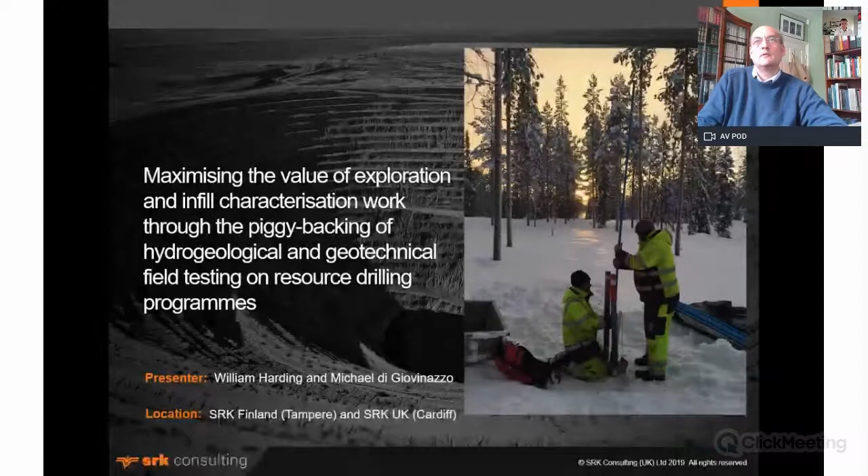Good afternoon, everyone. Today, Michael di Giovinazzo and I will be giving a short presentation on how one can piggyback hydrogeological and geotechnical information on the back of resource and infill drilling programs, effectively to bring project owners more value in terms of early information in the project, and also obviously saving money as well.

The background to this is that we're very conscious that resource and infill drilling programs to support exploration studies entail a lot of drilling over the course of some years. Sometimes on the bigger projects, we're talking about tens of kilometers of drilling. And when you reflect on the fact that those costs are typically 150 to 200 euros per meter, you can accrue a considerable amount of expenditure over several years.

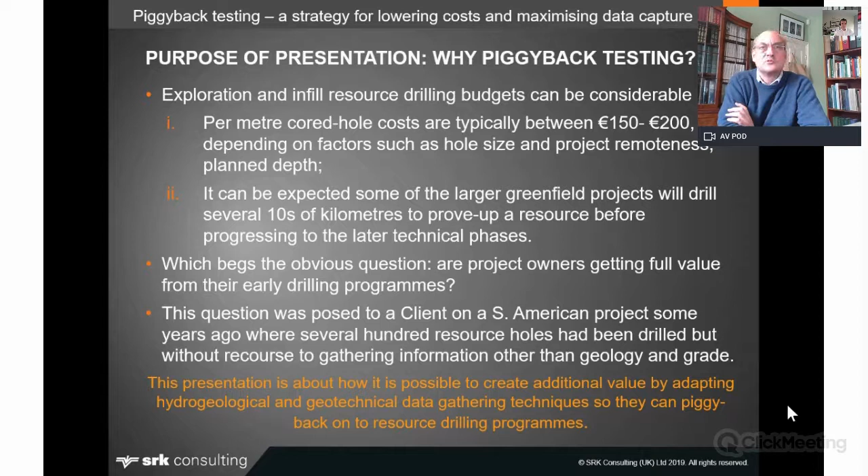So what normally happens with a resource drilling program? You have a series of boreholes, drill hole planning, the rigs attended and the drilling contractors attended for. There's a mobilization, and then holes are drilled, core is photographed, logged, and then cut and sent off for assay. There then follows an economic evaluation of the ore body based on the results of the drilling.

It's really only at that stage that questions start to get asked about, well, if we have a viable project here, we should be thinking about acquiring information to support other disciplines that will go towards producing a project-ready mining study.

But in reality, what we find is that by the time the geotech and hydro and other disciplines come into the picture, questions start to get asked about what's known about the groundwater system, what's known about the rock mechanics, and usually the data is fairly incomplete, not very good quality. So increasingly what we've found is that if one can piggyback onto a resource drilling program, you overcome a lot of the shortcomings of what historically tended to be just focused on a resource evaluation.

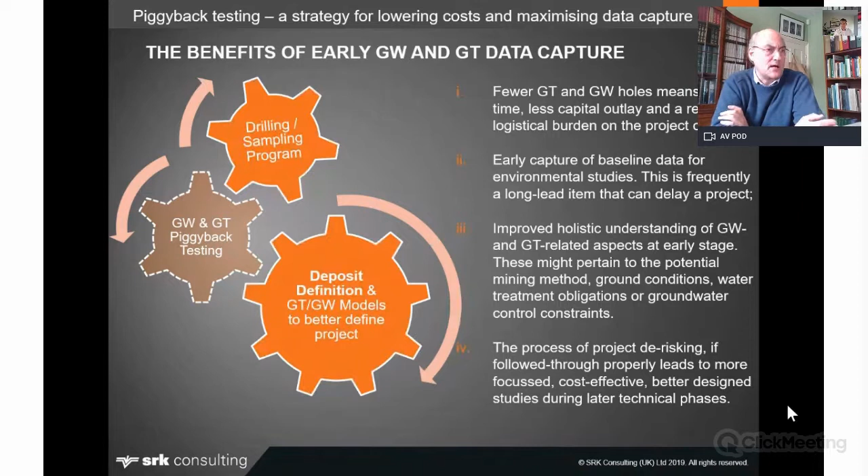I won't go into too much detail about the definition of piggybacking. It's essentially just bolting on extra work to another program. But in order to integrate and adapt hydro and geotech testing work, we need first of all to understand what the challenges are that we need to overcome. Key amongst those is the drilling schedule.

There have been a number of projects that we've been involved with in over recent years where it's very time sensitive, and so it's critical that whatever testing is designed fits into the resource drilling program where the priorities are to support an evaluation of the ore body.

There are other aspects. So from a geotechnical point of view, most resource holes tend to be of limited, in terms of orientation, a limited number of orientations. For a geotech study, you want to vary that orientation to give you some 3D information. And then there are other aspects like adapting to a reduced hole diameter, which impacts particularly on groundwater investigations.

And then, of course, there's also core handling. From a geotechnical point of view, the emphasis is on retaining and capturing as much information from undisturbed core, whereas a typical resource drilling program, there may be a lot of handling, and then there's this core splitting. And of course, if that's done before the geotechnical information is captured, the value of any geotechnical study on the resource drilling is greatly diminished.

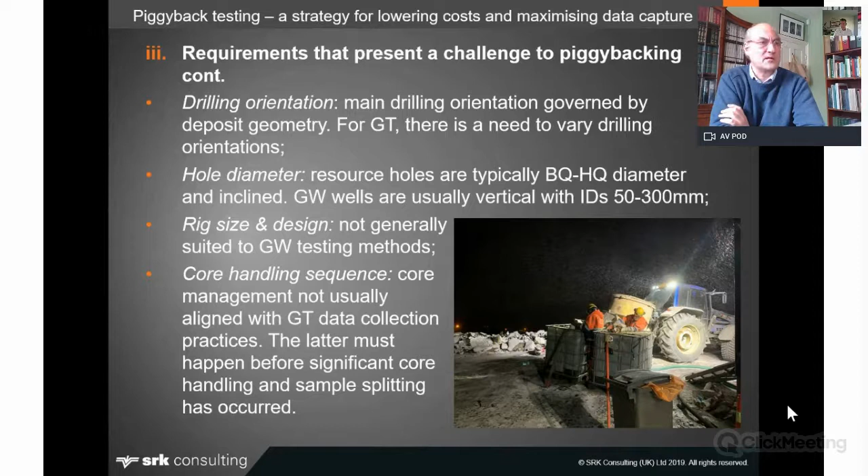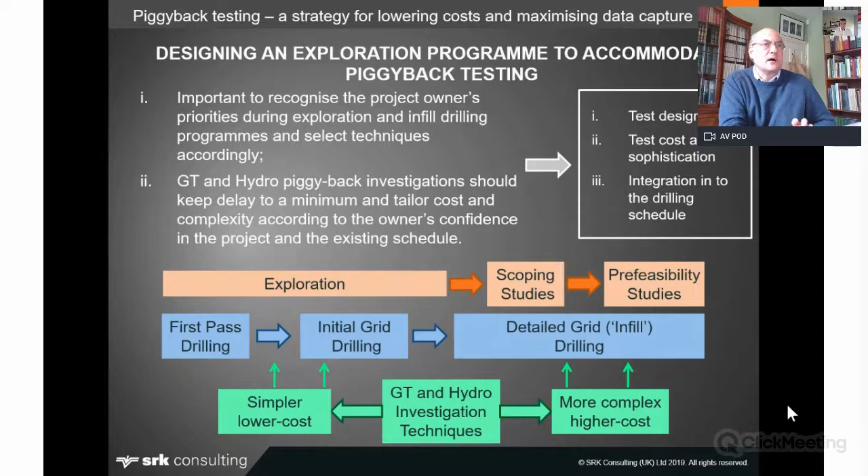There's a box on the right of this screen. This essentially summarizes what I'm going to cover in the next 3 slides. Essentially, I'm going to focus initially on test design. Then we're going to look at how we can adapt the tests to limit cost, and how we can moderate the test design so it's less or more sophisticated. And then I'm going to talk a little bit about integrating testing into a drilling schedule.

So from a hydro point of view, over a number of years, we found that actually you can adapt most hydrogeological techniques to resource and infill drilling programs. It's just a case of the level of sophistication, how you can adapt techniques to fit a much reduced hole size. And the same applies to geotechnical data capture as well. So here I'm just going to talk about testing techniques very briefly. I'm going to pick out a few examples to illustrate, but these are very typically hydrogeological testing and geotechnical testing techniques that we would utilize on the back of a resource drilling program.

So if I touch on packer testing, first thing I can say is that there is packer testing equipment out there that can fit in NQ and HQ holes, which is fairly critical from a resource point of view, because most resource holes really operate within the BQ to HQ size spectrum, which is essentially 60 mil up to 100 mil.

The packer testing is also important to emphasize that the packer testing technique is one that integrates well with the drilling program. You can actually drill an interval, run the clean up, flush the hole, and run the packer in, test 50 meters or whatever that interval that's been drilled, pull the packer out, drill another 50 meters, and repeat the exercise with the packer, and you can run it all the way down the hole that way.

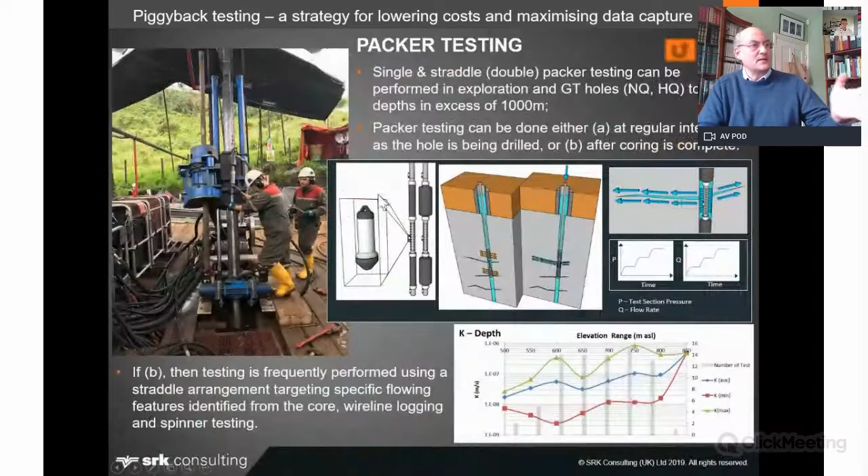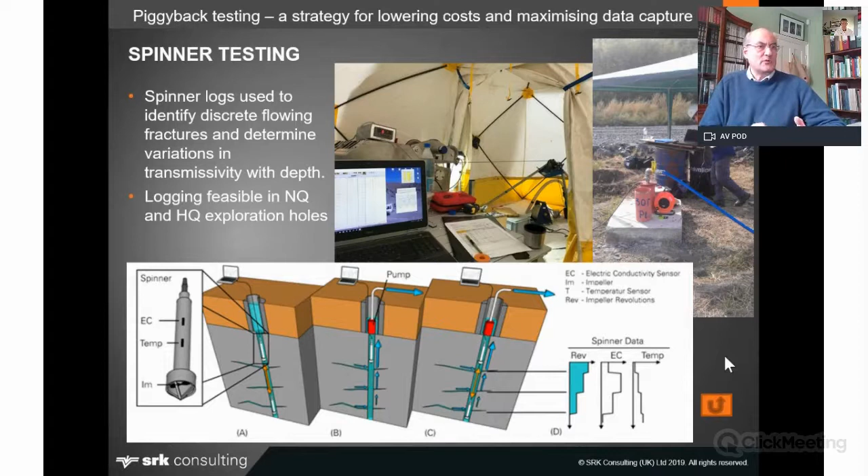So the emphasis there is flexibility and hole size. But what you notice is that we're having to use a rig to operate a packer. At the other end of the spectrum, we can build in monitoring wells that don't require a rig to sit over the hole, using fairly cheap materials, and likewise we can go in and develop and do geophysical and flow logging, again with no rig over the hole. These things are done after the resource drilling rig has moved off the hole.

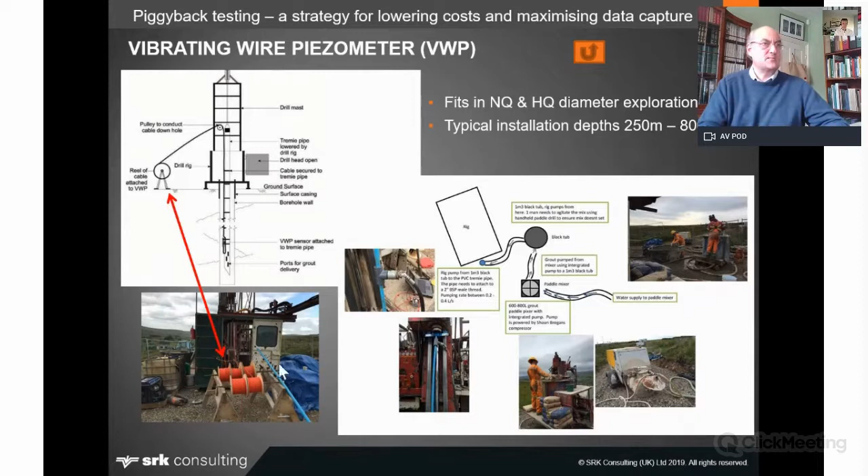Lastly, there's vibrating wire pressure transducers, which are rather more sophisticated than standard standpipe holes. But again, because of the weight of the equipment, we need a rig, and because we need to do grouting and various other things, it's better to have a rig over the hole. So I'm hoping I've demonstrated that there are different levels of sophistication, and some forms of test require rigs and some we can get away without.

The next point I wanted to talk about was how, based on the sophistication of the testing, you can control cost and time. For early stage exploration, you want a fairly unsophisticated, simple form of testing. But as you move into later infill drilling, you can use more sophisticated tests, such as packer testing or vibrating wire piezometers.

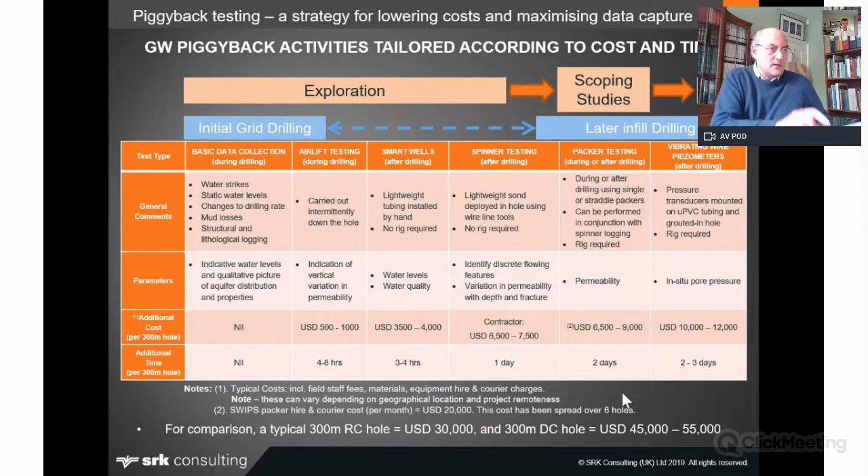The next point, which is really critical from a resource drilling program point of view, and I've touched on it already, is the need to not impinge too much on the resource drilling schedule. The two examples I have here on screen are based on actual time-pressured drilling programs, where we've worked with the project owner and the geologists on the team to develop different techniques to limit the amount of time the resource rig is on the hole.

If we, for example, were to use flow logging and smart well technology on the hole, there would be no delay to the resource rig. Alternatively, if you wanted to do something more sophisticated and use packers or vibrating wire piezometers, the rig would be on the hole for longer. That would obviously delay the program a bit, but the quality of the information you get out of it is better.

Michael, can I pass over to you, and you can perhaps chat very briefly about the geotechnical characterization and how we can adapt that? Thank you, William.

Most of what William has mentioned regarding the hydrogeological testing is related to the drill hole and during the drilling phase. From a geotechnical point of view, a lot of data can be collected in the early stages of the logging program for quite a bit less time than maybe thought a geotechnical logging program may entail. Usually fractures are counted and an RQD, rock quality designation, is determined in most programs, but by collecting another three parameters, you can get close to achieving one of the rock mass classification systems in your very early studies.

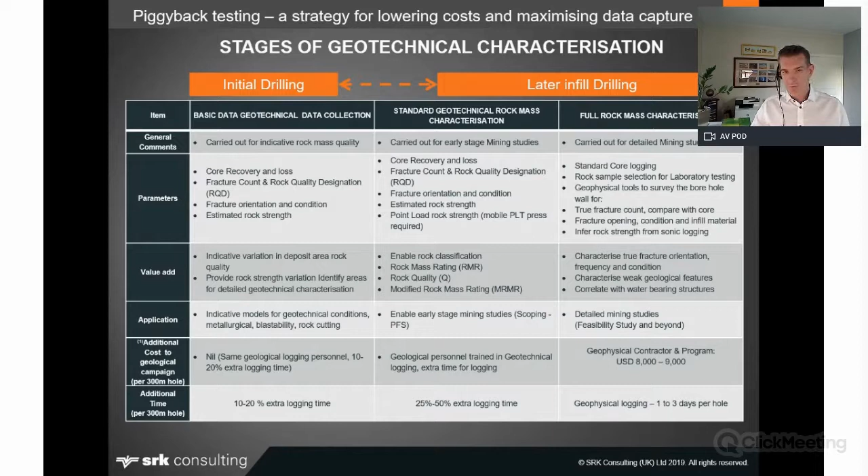So as I've got down the bottom of the table on the bottom row, 10 to 20% extra logging time using the same geological team that is logging the geology and structural geology, you can achieve a geotechnical baseline data set. For interest further into the study, there is extra time required in logging, so another 50% extra time will achieve the full set of rock mass characterization, logging, and therefore analysis.

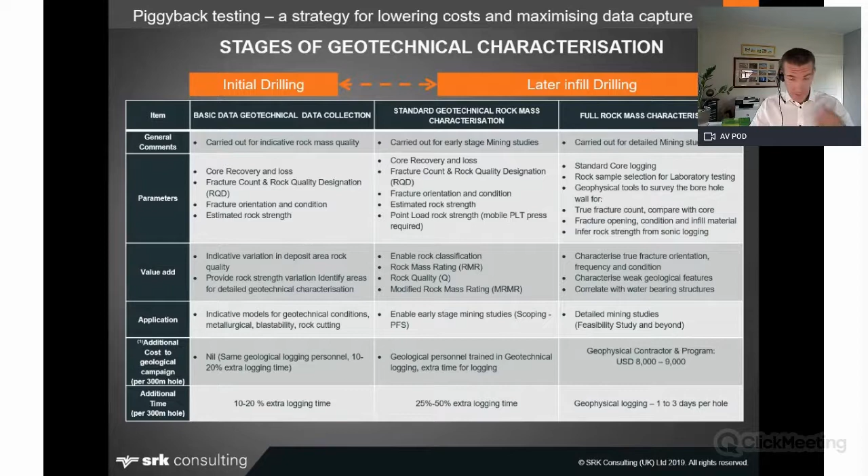And further down the line, you can employ geophysical techniques like what William is talking about, and actually scanning the borehole wall, which further defines what ground conditions you'll interact with. Just the next slide, William.

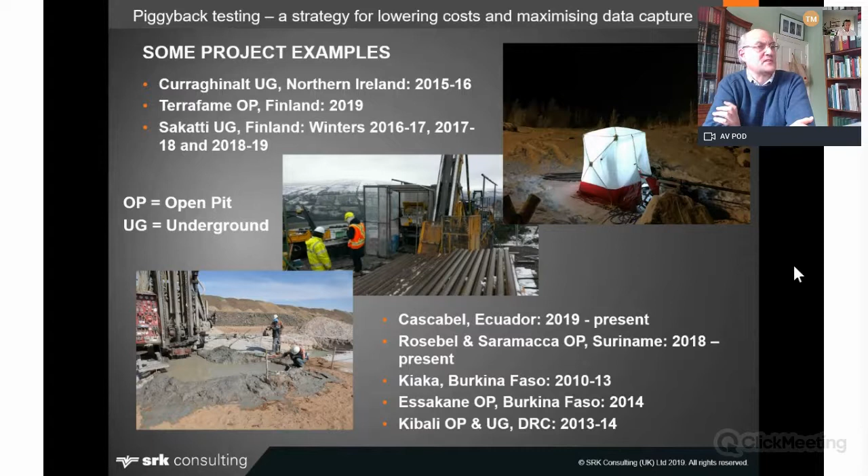So we're going to wrap up now. I just wanted to show a few examples of projects that have been completed in Northern Europe and Western Europe, in Africa and Latin America over recent years, where the project owner has carried out exactly what we've been describing in this presentation.

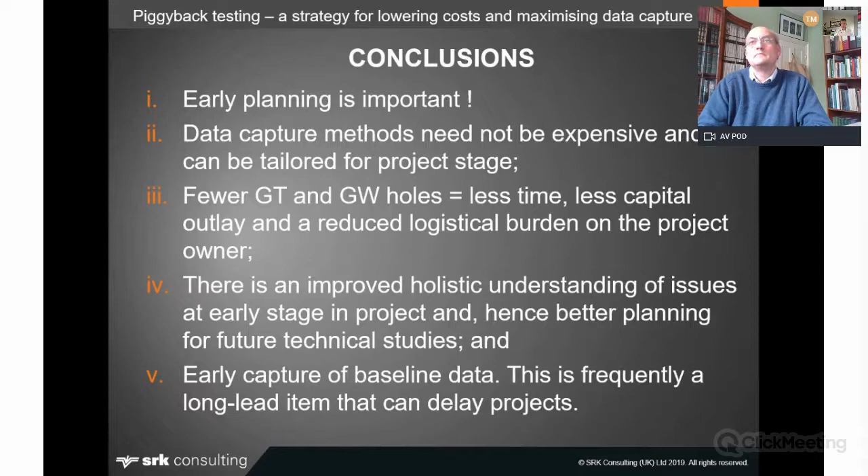Okay, we'll move on to our second presentation. Chris Bray is a principal mining engineer with SRK in the UK, and Chris is going to discuss planning for the use of battery electric equipment in underground operations. Something that we're seeing a lot of interest in, and I think will be of interest to quite a lot of people. So over to you, Chris.

Thanks. Okay, thanks for the introduction there, Tim. Is the slides coming up okay?

I would like to introduce you to some of our team's experience in planning for battery electric equipment in underground mines, where we continue to develop our capabilities with the progressing technologies in order to support mining companies.

Battery electric technology is increasingly being considered by mining companies as an alternative to conventional diesel power for underground mobile mining equipment. The SRK Group continues to develop and support mining companies in assessing the potential for battery electric equipment with mine planning, ventilation, cost estimation, and simulation capabilities.

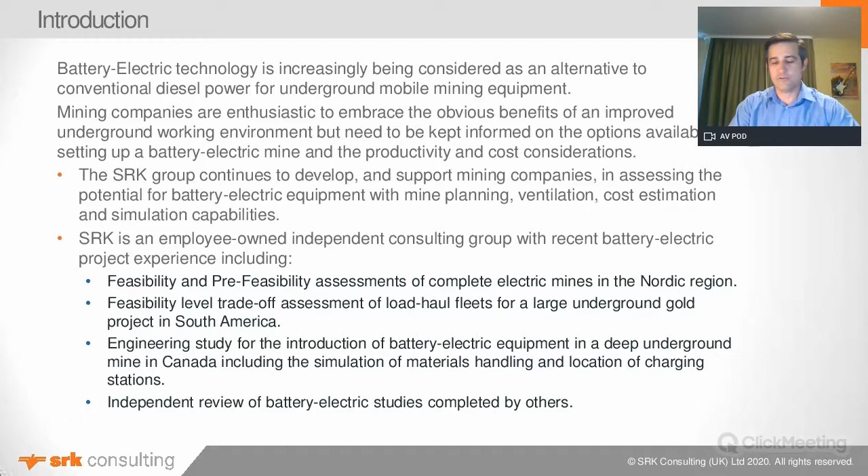SRK is an employee-owned independent consulting group with recent battery electric experience on projects and operating mines, including the Nordic region, up to a feasibility level.

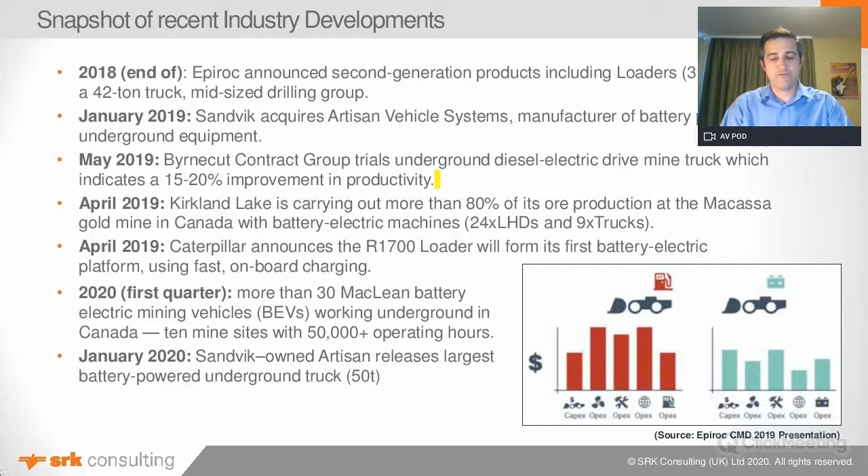This slide provides some examples of battery electric developments with equipment suppliers, mining companies, and contractors over just the last 2 years. It should be noted that the Kirkland Lake Macassa mine started using battery electric equipment back in 2012, and reports now indicate that it is using the technology for more than 80% of its ore production. Battery electric equipment options continue to increase through equipment providers, and factors such as equipment capacity and battery charging time are also improving as the technology continues to develop.

One of the most positive benefits from an electric mine is the improved air quality, which reduces the ventilation infrastructure requirements and includes smaller or fewer ventilation raises and fans. Ventilation requirements for diesel equipment are primarily driven by the combined engine power operating at any period, while electric equipment ventilation is more driven by minimum air velocities to manage heat, dust, and personnel underground.

Emissions are significantly reduced, as indicated by the comparative example table, showing the contribution from equipment and blasting activities to emissions from the mine for both a diesel mine case and an electric mine case.

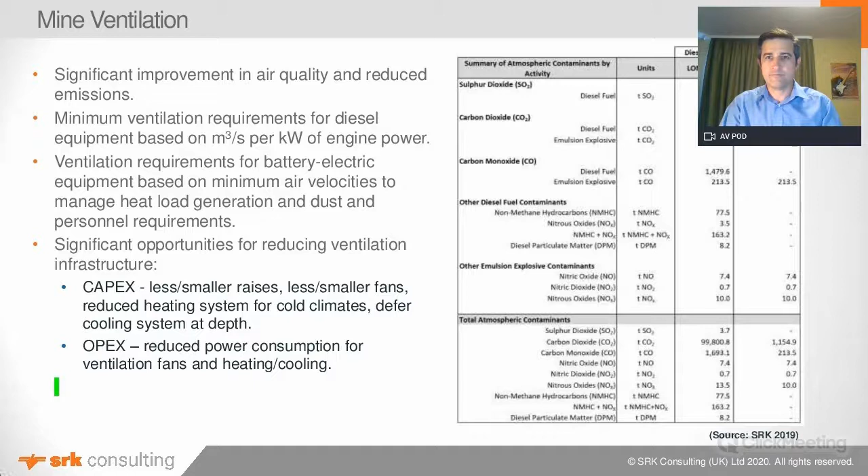The project economics are one of the primary drivers for a mine deciding to go down the path of battery electric technology, and the example shown here is for a battery leasing arrangement. The capital costs for electrical infrastructure can be minor in the big picture for developing a new underground project. Operating costs are heavily dependent on the cost of battery leasing, diesel, and power consumption. Material cost savings can be achieved through reduced maintenance labour and wear parts for battery electric equipment.

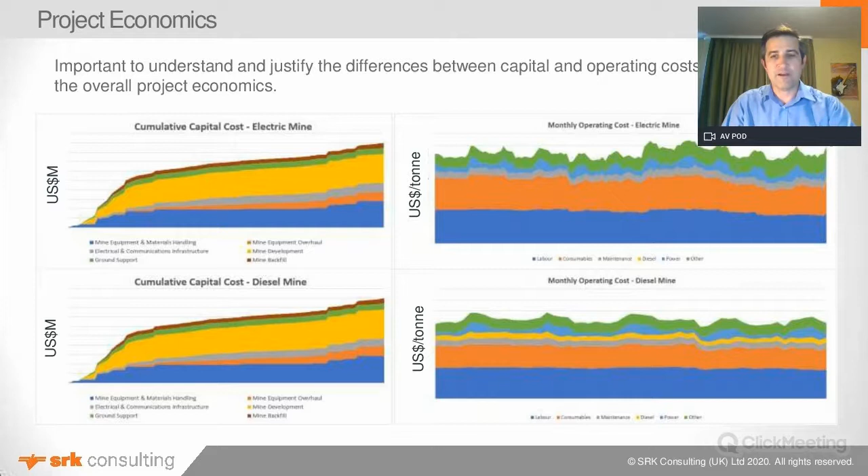The Global Mining Guidelines Group, or GMG, is a well known global community including experts from mining companies, equipment and technology providers, and consultants. GMG is focused on advancing the availability and use of standards and guidelines for developing technologies such as battery electric equipment for the international mining industry.

A recent survey undertaken by the group provided some useful results to consider when progressing towards an electric mine, including the information which provides the most value, and equipment and alternative sources of power which are considered a priority. If you are interested in the full survey results, a link is provided at the bottom of the slide for following up.

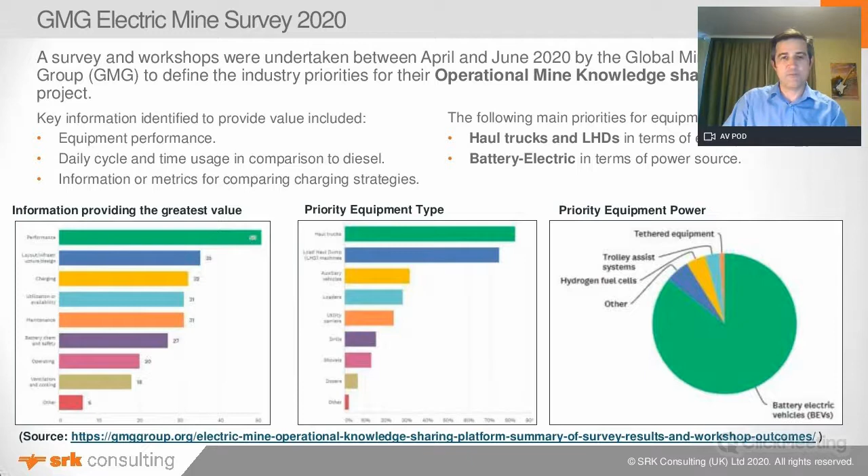Every project assessing battery electric equipment for underground mines provides new learning outcomes, as we've found out. I'd recommend that where possible, battery electric considerations are assessed early in the project to develop an understanding of the mine design, requirements for charging, and estimates of costs. Detailed planning must be considered for shift structures and charging opportunities for the equipment.

In conclusion, proper planning and trade-off assessment is required to understand the opportunities for battery electric equipment. The technology for battery electric equipment continues to evolve with improving cost and productivity considerations.

SRK values external support from specialist electrical engineering groups such as Bestech, and certainly appreciates the ongoing contributions from equipment suppliers. SRK also continues to work with universities and support graduate research projects on the assessment of developing battery electric technologies.

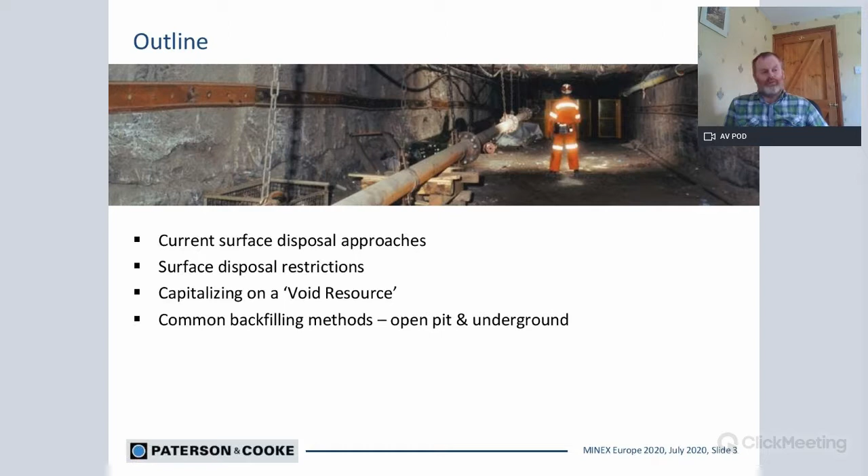Okay, so for surface storage, we generally have two main methods for waste material. We've got rock dumps and we've got the TSF, the tailings storage facility.

So TSF, we've got wet and dry facilities, and the wet facility generally takes a tailings slurry from the process plant, deposits it in a large-scale pond where it dewaters and the like.

Apart from the operational issues, you've got long-term factors with these TSFs. You've got to maintain the drainage post-closure, liquefaction risk, erosion, stability, and the like. There's a large surface area associated with this, so the land demand can be quite high, and that could be an issue in certain sites.

You may have height limitations. We know about the high-profile failures that have occurred, so I won't go on about that. But that leads on to your social license to operate - an understanding that you need to behave responsibly and demonstrate that you're performing as best practice and doing the best you can do.

There's been a bit more of a drive in the past few years towards dry stack of tailings. The idea being you pressure filter the tails, return the water back to process, and then dry stack and compact your tailings. Not all tailings are suitable for this, so in some cases it's still viable to stick with your wet tails facilities.

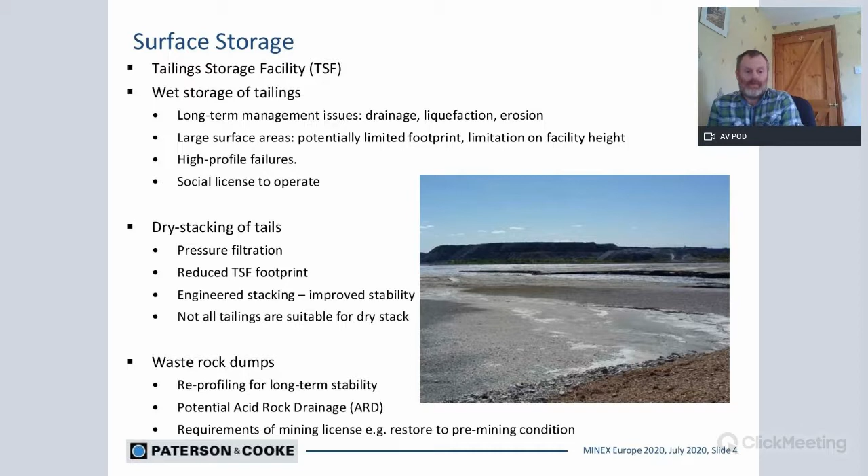So this restricts what you can do on surface, but it also gives an opportunity to stow material in the underground environment.

What we're talking about here is the void as a resource and treating it as an asset rather than just a depleted area of mining.

So what we're proposing here is, instead of stacking material on surface, consider putting what you can into the old workings, whether that's surface or underground. So there are potentials to stow waste below surface.

Part of this is to reduce the volume of material stored above surface. But there's also opportunities to stabilize existing openings and manage the long-term stability of old pits, and try to help reduce or eliminate geotechnical hazards.

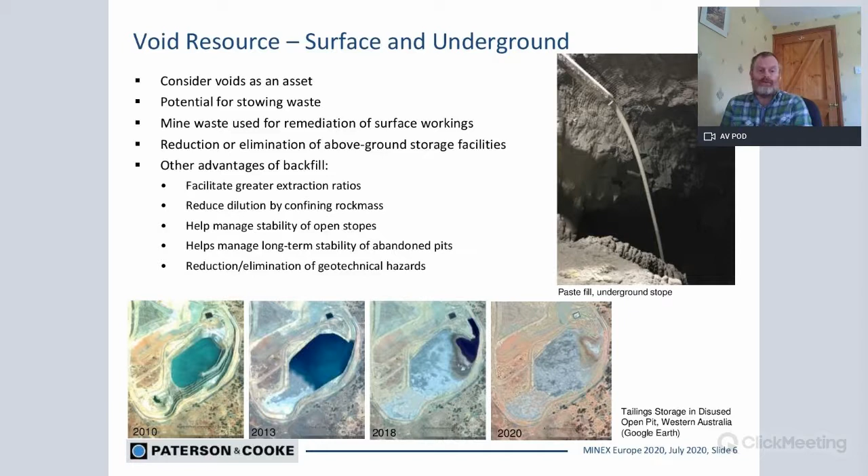As far as the open pit void resource, typically these are rock filled, but as per the previous slide, you can tailings fill in certain situations. You can use rock fill to help mitigate against future stability issues by, in the example below, buttressing a failure, but also using the waste rock instead of surface storage into the old open pit here to help restore the mining profile to the pre-mining state, dispose of material in the subsurface environment, and stabilize the workings.

A little note I should add there, of course, is in-pit disposal of waste, whether it's in a live pit or a dead pit, you need to be absolutely positive that you're not going back in there again. Because if you try and do this in a pit that's marginally below cutoff, as several operators have done in the past, you will sterilise your resource or incur significant costs to get back in there.

A brief overview of underground backfilling methods, just for those that aren't aware. So starting in its simplest form, we're talking about rock fill - taking development waste in the underground environment and placing that inside an abandoned stope or a disused stope.

This is suitable in areas where the backfill won't be exposed again, but if you plan to mine adjacent to it, you need to bear in mind that waste material may fall in. So in many cases, but not all, it's not a viable method if you need to expose beside it.

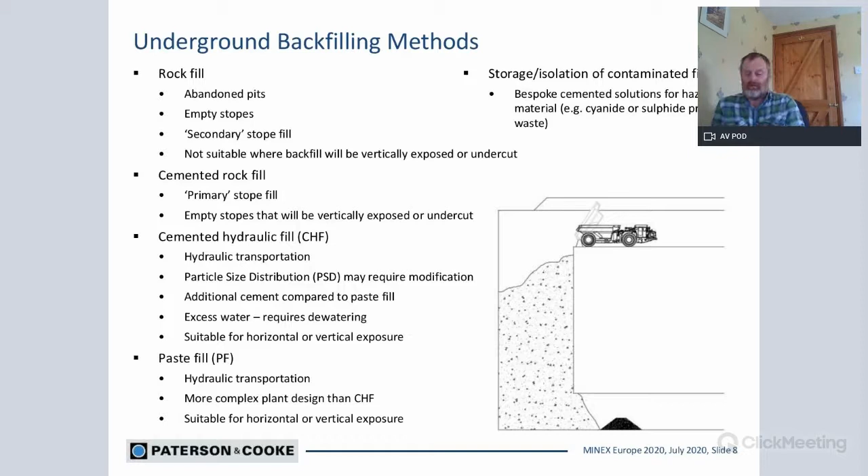There are a few bespoke options besides. There's a few combinations of the previous options, but an example here might be taking a cyanide sludge or some kind of horribly contaminated material, which you can combine with cement, take underground as a block, and store indefinitely in the underground environment rather than surface.

You can maximize your resource with the aid of backfill. So as well as the environmental benefits above ground, you can look at trying to increase extraction. A common mining method you may encounter in an underground setting might be leaving pillars for stability and to manage the hydraulic radius. What you can do in some settings is backfill in cycles, so you mine, backfill, mine adjacent, backfill, and so on, largely eliminating the requirement for pillars. This is case dependent on many things, but you do have potential to reduce the amount of ore you leave sterilized in pillars.

There are other sequences you can look at. There's primary, secondary stoping, as shown at the bottom, where you take your primaries, in this example as a CRF, and the secondaries could be taken as a CRF or a rock fill. In the case below, we were talking with a client about a rock fill, and they were modifying the mining system so that they could have an uncemented rock fill and basically advance that as they retreat the ore. So they were prepared to wear a bit of dilution for cost savings in the binder. It's a modification of Avoca.

One of the biggest drivers in backfilling, if you want to place your material underground, is your material balance. There's no point in having the perfect material if you haven't got enough of it. You need to understand what you have throughout the mine life, when you have it, and when you can place it.

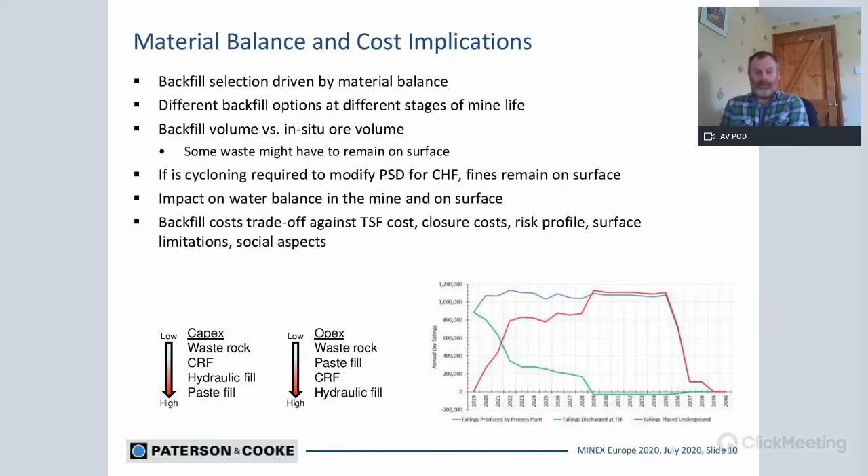There's been a bit of a driver in certain mines to look at planning for an underground plant, again trying to reduce surface footprints and keep what material you can underground. With the underground plant comes an underground backfill requirement. So if you can get the backfill plant underground at the same time, or even get the backfill plant underground regardless, you can save on haulage, you can save on reticulation costs in the case of paste fill, you can try and manage your pumping costs and material haulage. If you can reduce material going to surface, that's a good thing.

Bear in mind, though, you're going to have to stockpile raw materials underground. So even if you can keep everything underground, you're still going to be hauling cement in, for example, and you may need to silo or stockpile various forms of rock fill.

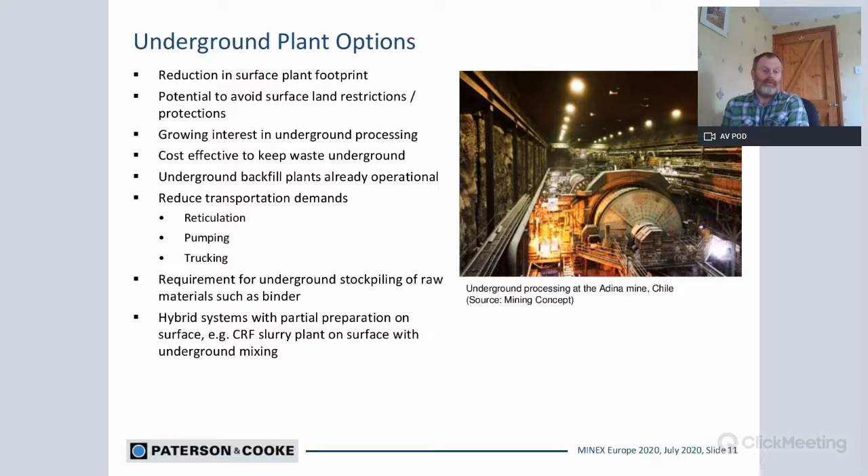Underground plant designs, the process is generally the same as surface. You design your process, but the layout differs. So it depends on your rock mass, what chambers you can manage, what stability you can manage. But what we're looking at generally is trying to cascade the material from top down. So you have your raw materials feeding at the top, vertical connections where you may be doing the mixing, as in this example, then off to some backfill pumps. That's the same general layout as we'd apply in a backfill plant anywhere on surface, but you are constrained by the rock mass and being underground.

A couple of major considerations there are maintenance, being able to get in there to maintain the equipment, so you need to plan around that, but also stockpiling raw materials. So if you're bringing binder in, you need a storage facility. If you are feeding in an aggregate, you may need an aggregate silo blasted into the rock or something. But all of these, and of course you've got your extra demand on your power system underground, all of these things need to be considered from the outset.

Okay, now in conclusion, and to summarize here: backfill is typically considered for mine stability, but it's increasingly becoming considered by clients for waste disposal to minimize surface waste. Apart from the direct cost, you're also looking at savings and opportunities associated with permitting and the environment.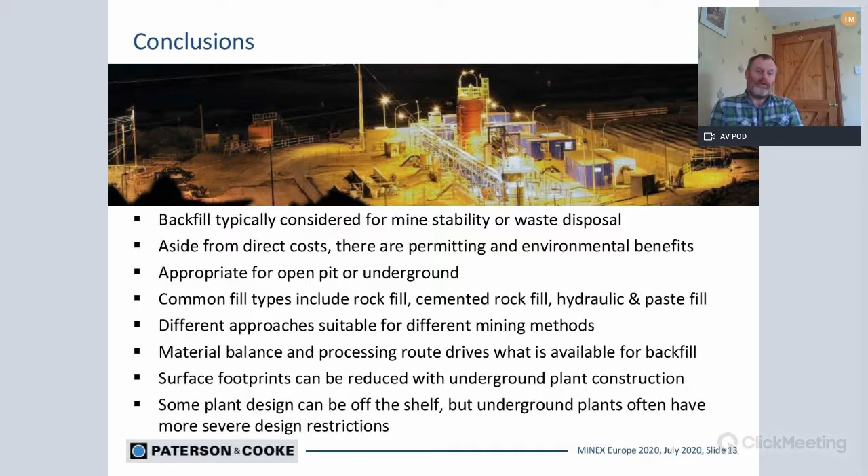That was great. Very clearly the environmental benefits coming through there on the use of backfill, as well as the more traditional trade-off of maximising resource recovery and balancing that against mine costs. So good to see that those things are coming through to the fore.

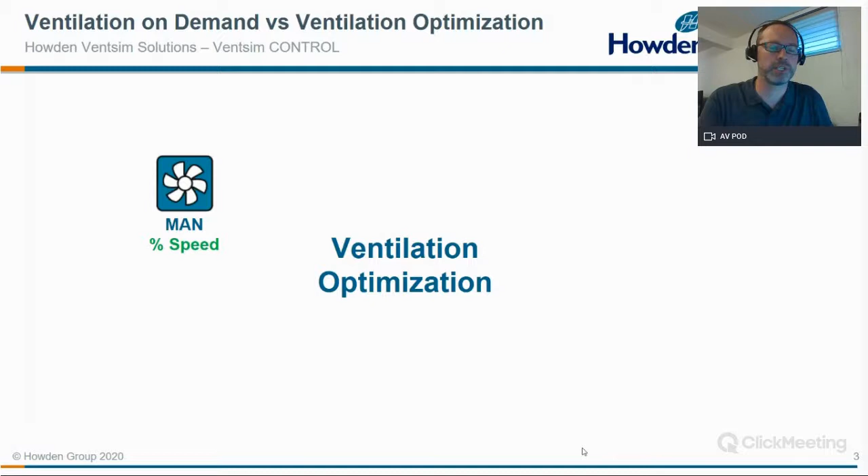In ventilation optimization, some examples are running your fan speed at a manual setting remotely, synchronizing two fans to run at the same speed, having a gas sensor open automatically a door, or having flow measurements adjusting a regulator on the ground, or having a scheduled event that can open an airflow regulator on the ground.

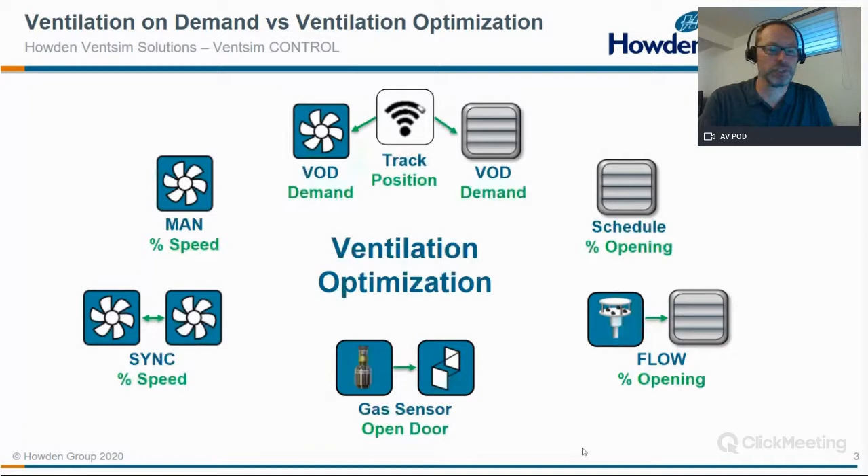And then there's ventilation on demand as well, which is a type of ventilation optimization. So what is ventilation on demand? It's an automatic calculation of the airflow demand based on vehicle and personnel presence.

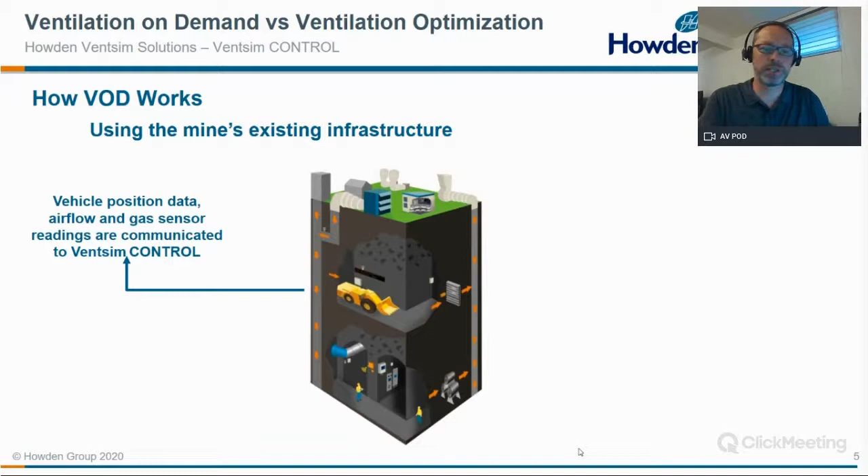So how does VOD work? We're using the mine's existing ventilation infrastructure, and we gather the vehicle positions, personnel positions, the airflows, gas sensors, and then we send that to a VentSim control, which in turn takes the calculated values, determines the necessary fans and regulator positions, and sends that information to the hardware, where the PLCs and the remote IOs enable the remote control of the equipment, such as fan starters, VFDs, and actuators.

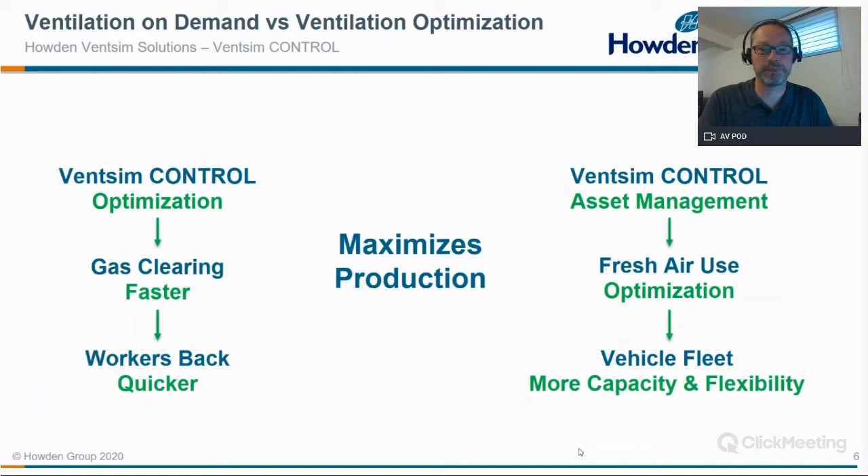With VentSim control, you can maximize production. There's different levels of optimization, one being able to clear the gases faster to get the workers into their zone faster. Then we have asset management, which optimizes the fresh air use, giving more capacity and flexibility to the vehicle fleet. The second aspect is improving safety, which is very important.

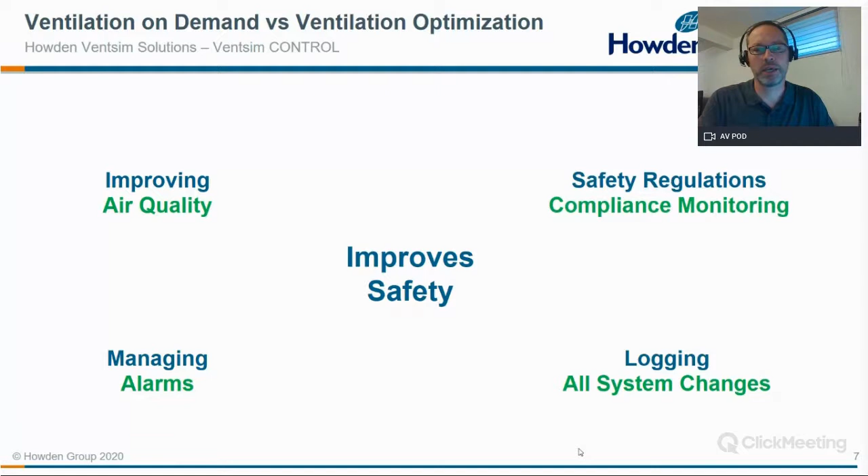Firstly is to improve the air quality. And then there's a whole system of managing different types of alarms. We're logging all the system changes, and we assure the compliance monitoring for safety regulations.

The third aspect is energy savings. Again, we have different levels of optimization. We always meet the airflow demands, but we reduce the amount of wasted air, which in turn reduces the energy fan consumption. We have advanced controls for the operation optimization of fans and regulators. These generally get between 10 and 50% energy savings.

There are some additional cost savings, such as peak electricity or the required air heating and cooling based on a reduced airflow into the mine.

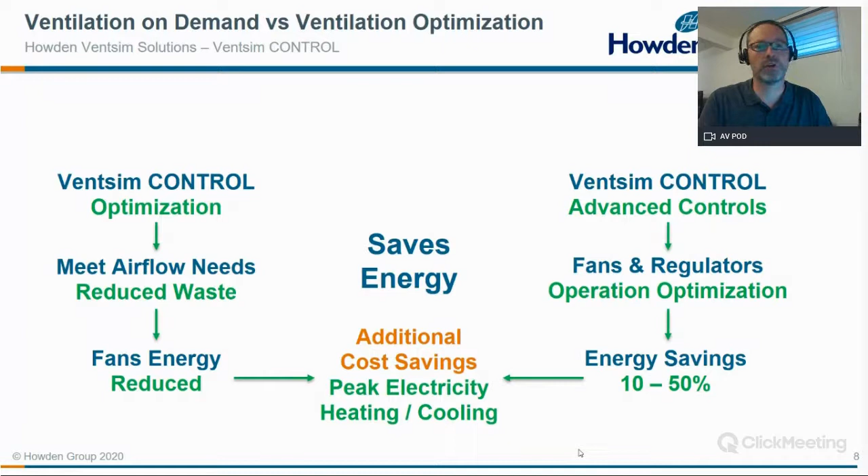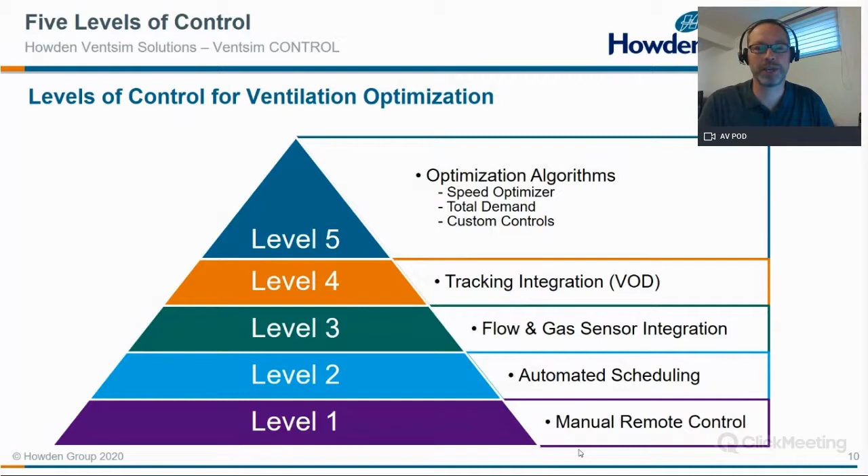Let's look at the 5 levels of control. Level 1 is manual remote control. Level 2 is automatic scheduling based on events. Level 3 is automatic flow control with also gas sensors that can be enabled. Level 4 is ventilation on demand with tracking. And level 5 is optimization algorithms such as speed optimizer, total demand, or custom controls.

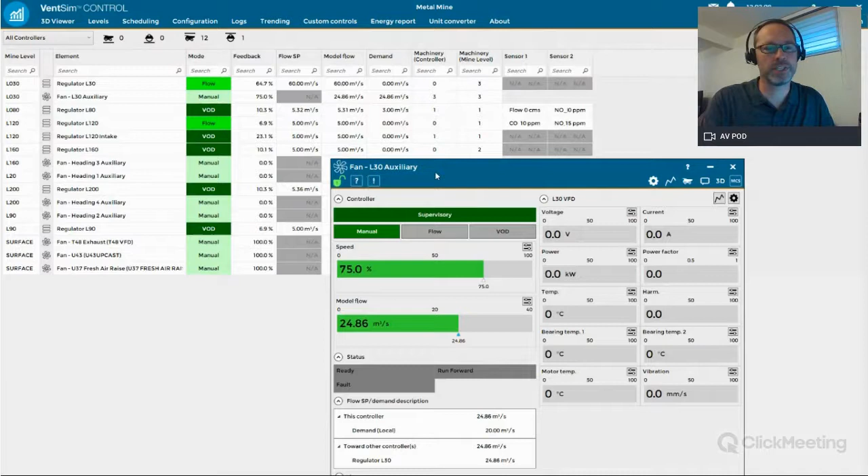And directly from here, you can open the faceplates to be able to access the fan control. So you can set the different control modes and the operating conditions for that mine, for that fan.

There's also a way to visualize the ventilation infrastructure. For example, here we have a 3D model which is done in Ventsim Design, which is a world-renowned ventilation simulation software. We basically import that and run the Ventsim Design model into Ventsim Control to have simulation data at the same time as live instrumentation data.

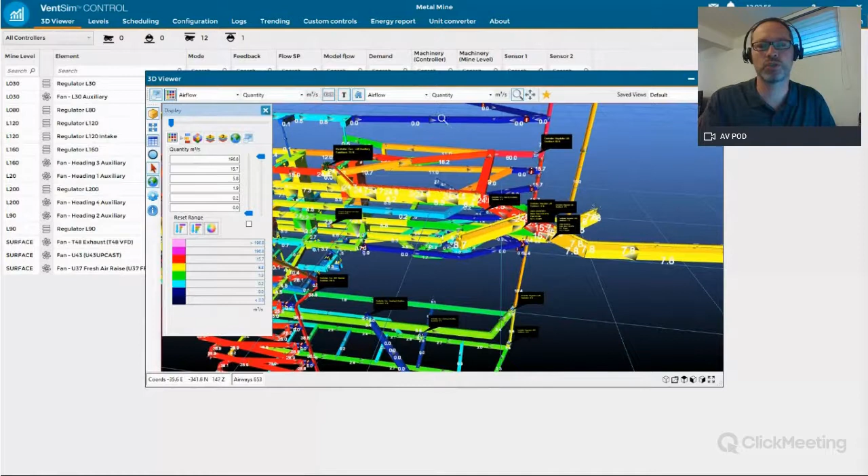So the black boxes show live instrumentation data from, for example, this airflow regulator, and you can see the resulting simulation and real live data. You can double click on these objects and access the faceplates to control that regulator or fan.

So here we can see that we can have a simulation environment that can be used to design the ventilation control ahead of time. And then when we get into the live control, then you just switch over to have controlling live the fans and airflow regulators or doors.

Okay, so here there's another way to access the information. You can, for example, import the level plans, superimpose the controllers, and you can see the control information and control directly from the level plans.

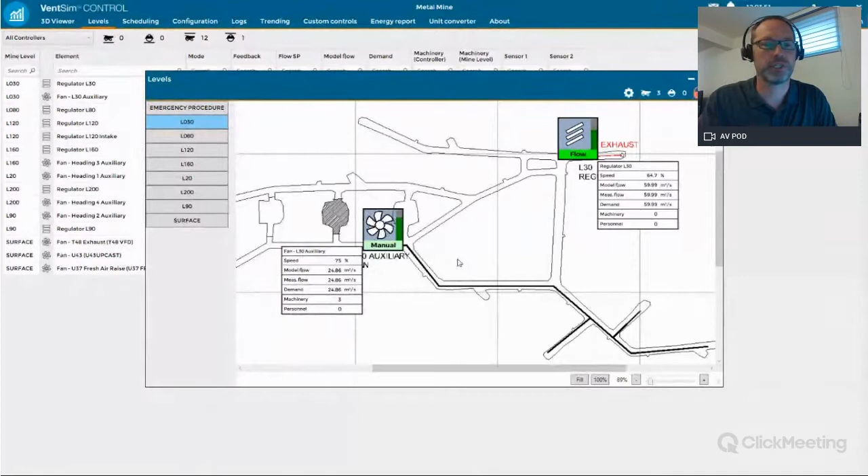So it's all done through a configuration process. There's no programming involved, so it's very easy to configure. There's a number of reports that can be generated, energy report, all kinds of reports and logs that are automatically generated.

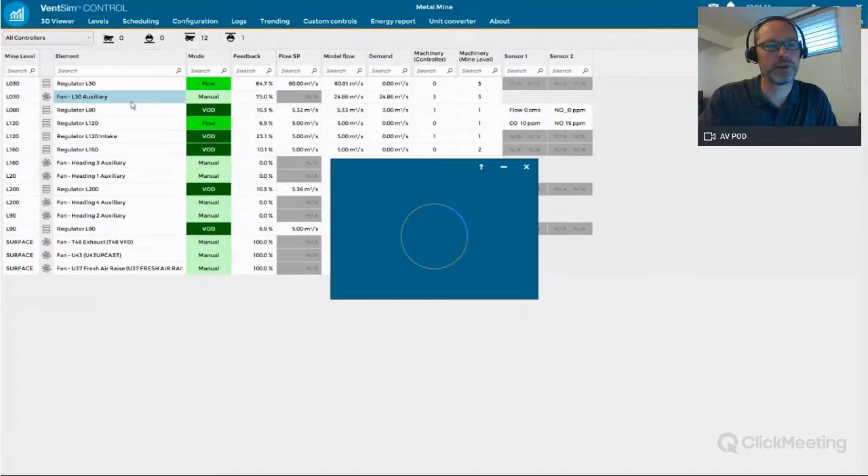Let me show you quickly the 5 levels of control. So for example, here for this fan controller, I have it in manual control. If I set it to 50%, for example, I have automatically configured in background an alarm. So alarms can be acknowledged.

These alarms, if you don't have somebody looking at the system live, can be sent to an email to alert somebody that there's something happening in the system. They can log in and take action. Once the alarm condition has been lifted, the alarm disappears.

That's manual control. Flow control is basically controlling the flow set point. So if we change this to 20 meters cubed per second instead of 25, the controller automatically adjusts, based on the PID gains which have been configured, the fan's speed to attain the desired flow set point. That was actually level 3.

Level 2 control is the scheduling control. For example, here I have a scheduling event that changes the fan speed of this fan to 70%. Right now it's around 61 or so. I can schedule this event in time, or I can just start it automatically, and that will change the setting to that manual 70%.

Another example of flow control is we can enable a gas bias, or temperature bias. In a zone, for example, here we have carbon monoxide monitoring. We have a set point of 9, but we're actually reading 10. So if I enable this gas bias, it's automatically going to increase the airflow into the zone to flush these gases. The same thing could be applied for temperatures. If you have high temperature conditions, a temperature bias could automatically increase the airflow pressure coming in to bring down the temperature in that zone.

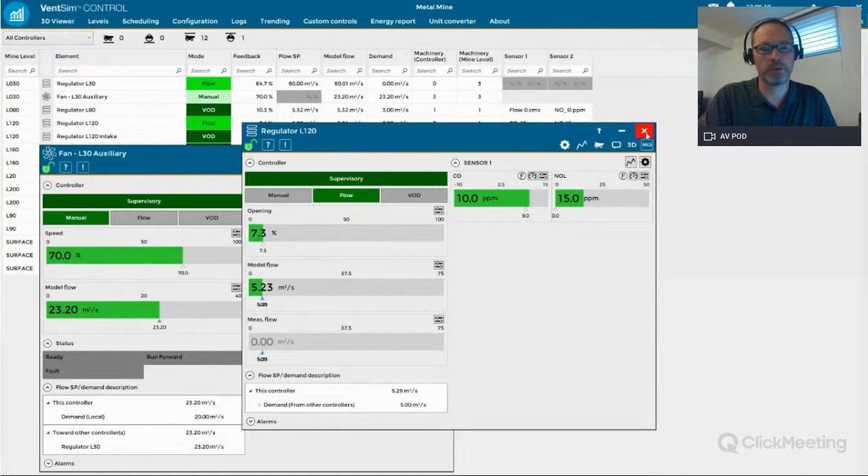We have different trending and all kinds of information that can be displayed.

The next level of control is level 4, which is the ventilation on demand and tracking control. Here I have the tracking interface, which is usually fed by the tracking system - Ekahau, Aeroscout, NewTrax, for example - automatically feeding the system on what vehicle is in which zone and how much air it requires. We can see in this demand, we have 20 meters cubed per second, the requirement based on this one diesel truck that is on. If I switch over to ventilation on demand on the controller, we can see that the set point is coming from that local demand of 20, and the controller is automatically adjusting to meet that demand.

Level 5 has a number of optimization algorithms that can be applied. I'll show you one example, which is a fan speed optimizer.

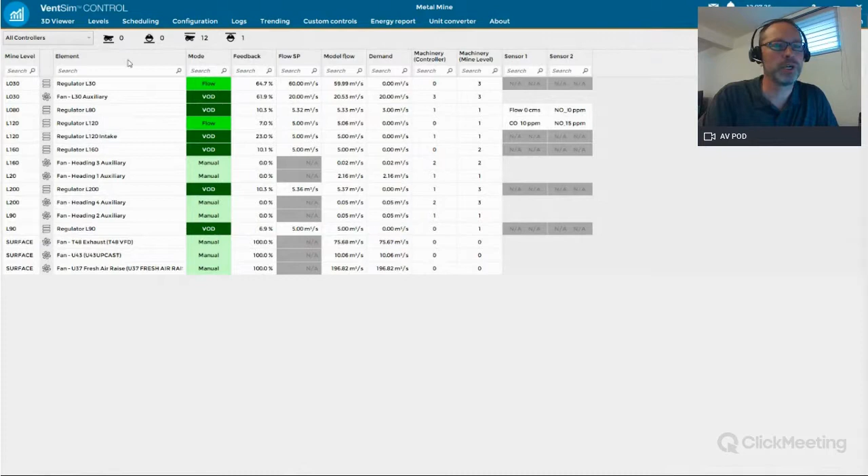Here I have one fan exhausting from 4 parallel levels. The fan is currently at 100%. Each of the levels has its own flow or ventilation on demand set point, so it's maintaining its flow set point - that's its job. And the fan right now is 100%, so it's not optimized.

So if I enable the optimization, I'll turn on the speed optimizer, and it'll automatically look at the airflow regulators associated to it, and alleviate the restriction to automatically decrease the fan speed. We can see this airflow regulator, which is closest to 80% opening, our set point, is actually increasing gradually in opening. That's relieving the restriction, not just on this one, but all the other regulators as well. So the fan can automatically decrease in fan speed and optimize its energy consumption.

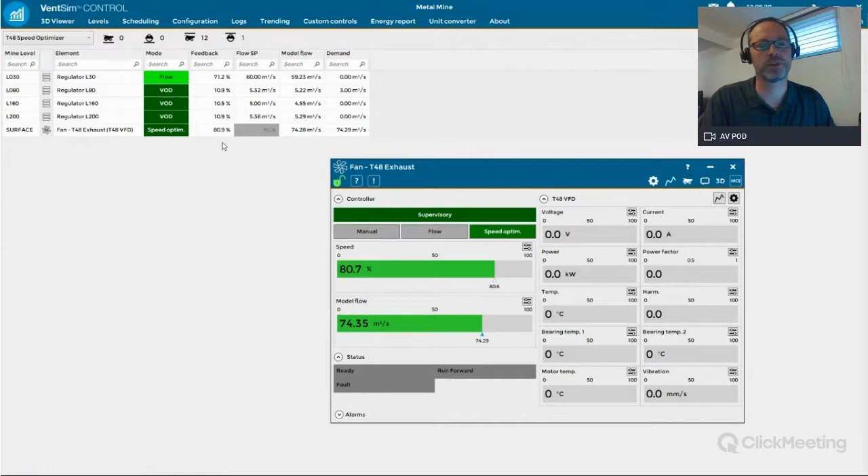Okay, so that's just a quick introduction. Let me pursue with my slides and have a quick look at the software-hardware integration.

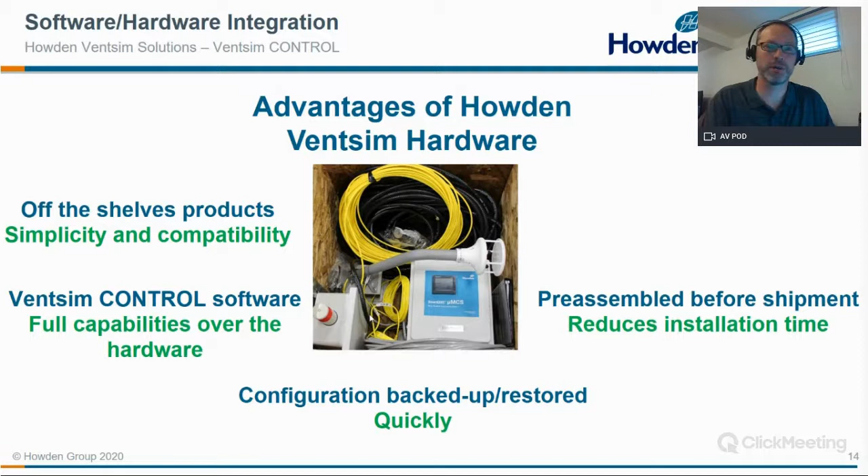There are basically 2 options for the ventilation on demand hardware. We can use the mine's existing hardware, or we can also get the Howden Ventsim hardware. There are some advantages of the Howden Ventsim hardware: they are off-the-shelf products which provide simplicity and compatibility. The Ventsim control is designed to take account of the full capabilities of the hardware. The configuration is backed up and restored very easily and quickly. The hardware kits are pre-assembled before shipment, which reduces installation time on site, and there's no programming involved.

So what is required to install on site? First, you need a communication network - it could be Ethernet, Wi-Fi, LTE. Then we need to have the automation layer with PLCs, remote IOs, or the Howden hardware. You need a software license, based on the control level and number of devices you're controlling. And you need 2 servers, one for control and one for HMI. These could also be virtual servers, and then we provide training either at Howden or on-site.

Additional on-site options are the system configuration, which can be done by us, or we can train the clients to do that. Same thing for the system commissioning. There's software maintenance that needs to be considered, and remote or on-site support that we can provide as well.

So let's have a quick look at some case studies to have some real-world examples. Here we have the Fresnillo San Julián mine in Mexico. It has all 5 levels of control, controlling 15 primary fans, 12 airflow regulators, and all the associated flow, temperature, and gas monitoring. In this example, they're saving around 178,000 euros per year.

Another example is the Glencore Nickel Rim South mine in Canada. That has also the 5 levels of control, controlling 5 primary fans, 199 auxiliary fans, and 21 airflow regulators with all their monitoring. Just an example, they have 5,550 horsepower just on the primary fans on the surface. Their main justification was to increase production and manage their fleet, but they also achieved significant energy savings.

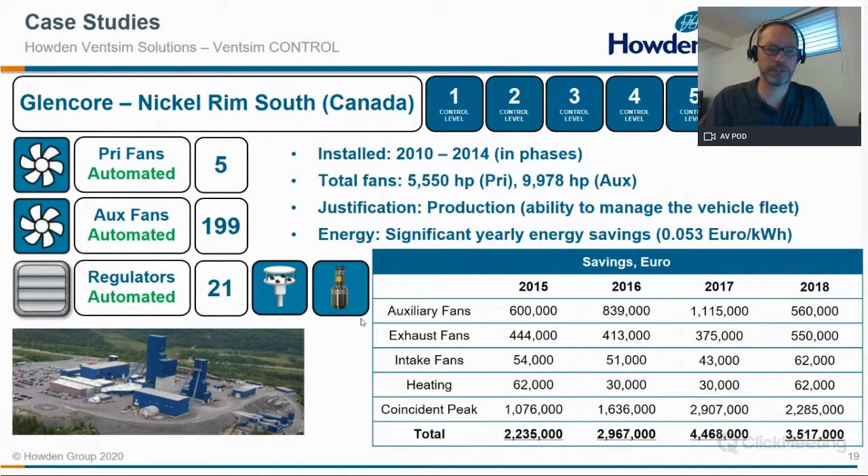Next example is the Newmont Éléonore mine in Canada. We have 5 levels of control, controlling 5 primary fans, 240 auxiliary fans, 41 airflow regulators, all the monitoring associated with them. They have 196 vehicles with RFID tracking, and were able to achieve very significant yearly energy savings between 4 and 5 million euros per year. They were also last year awarded the Eureka Prize from the government for innovation with our ventilation on demand control system.

Also, we can look at the cost of the energy, which is quite low. So we can see that you can achieve high energy savings even with low cost. And we'll see some other examples where the energy cost is actually much higher, which could yield much more energy savings.

So here we have an example of Dugald River mine in Australia, which has 3 levels of control, controlling 22 auxiliary fans, 24 regulators, all the associated monitoring. Howden provided all the automation panels here, and we've also provided the automated regulators for this project.

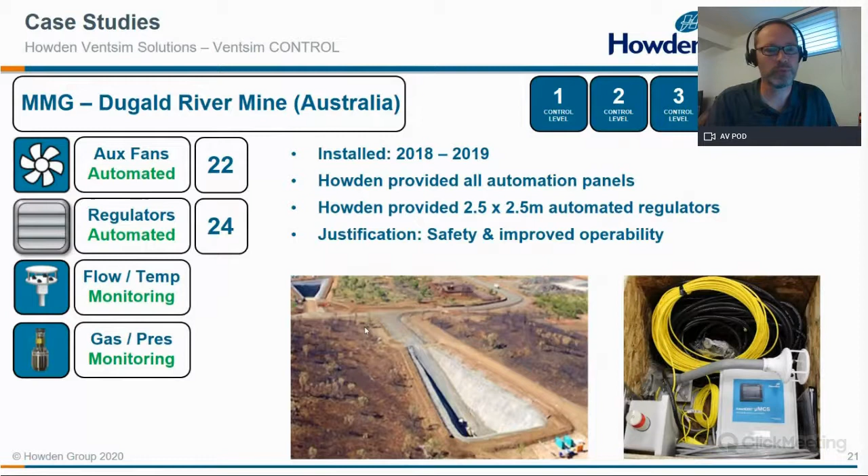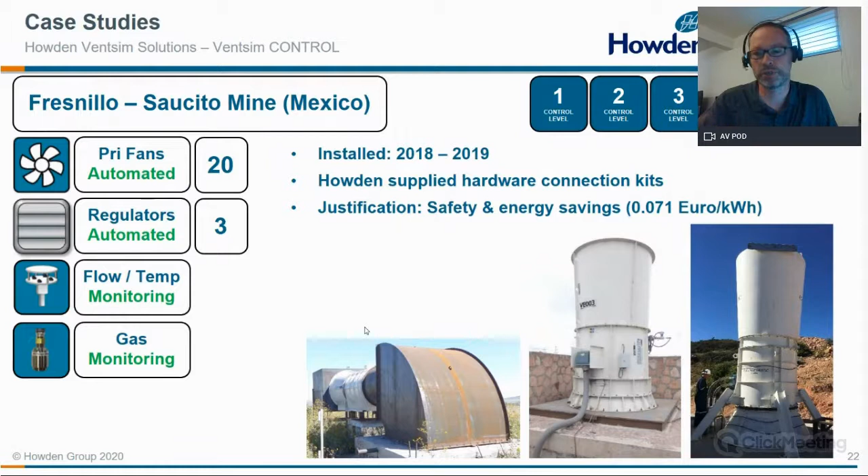Another example is the Fresnillo Saucito mine, which has 3 levels of control, controlling 20 primary fans, 3 regulators, and the monitoring. Howden also supplied the hardware kits in this case, and we can see the energy cost is quite more than the previous examples that we saw.

Fresnillo La Cienega mine has 3 levels of control, controlling 4 primary fans, 2 regulators, 1 door, and all the monitoring. We also supplied the hardware kits in this example.

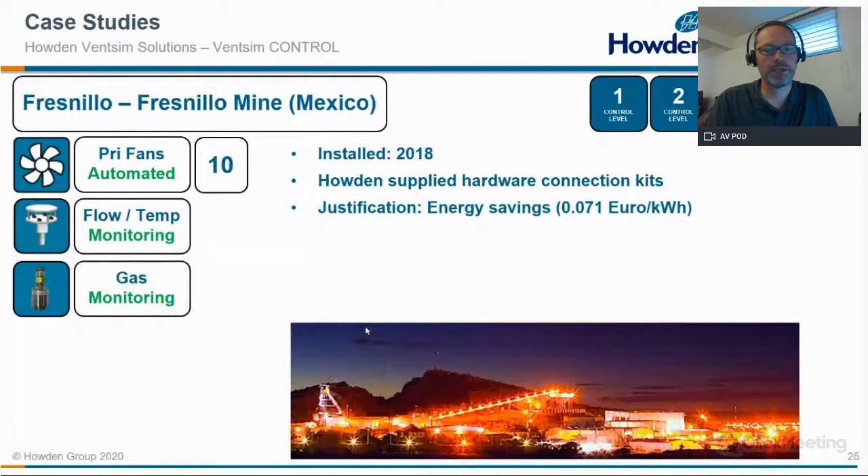The Barrick Cortez mine has 2 levels of control with 3 primary fans. Fresnillo mine has 2 levels of control with 10 primary fans. And the example of Glencore Fraser mine, we have 2 levels of control, controlling 107 automated fans.

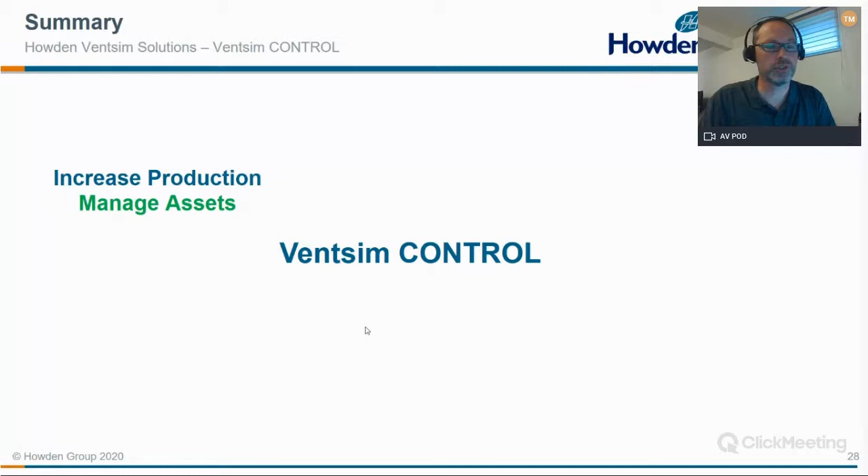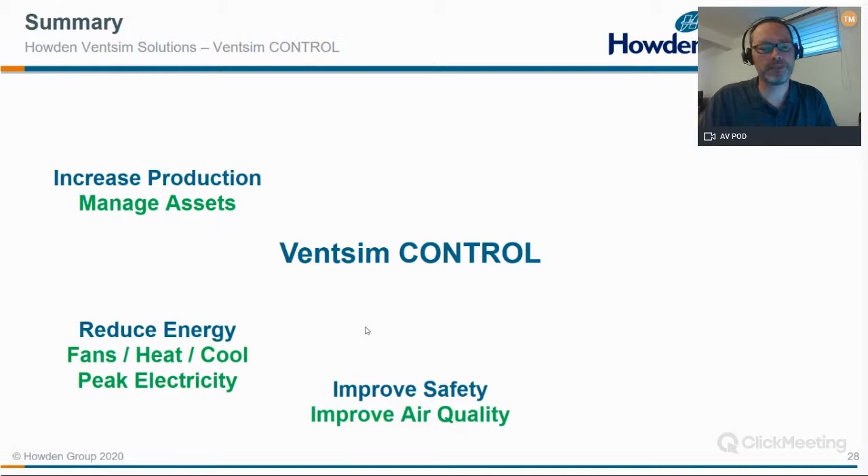So as a summary, with Ventsim Control, you can increase production by managing your assets. You can reduce energy by optimizing your fans, heating, cooling, and reducing peak electricity as well. You can improve safety - one of the main factors is improving air quality. You can plan ahead for the mine life ventilation needs. You can log and trend all the important data. And now the clients can take control with SCADA for real-time control and optimization.

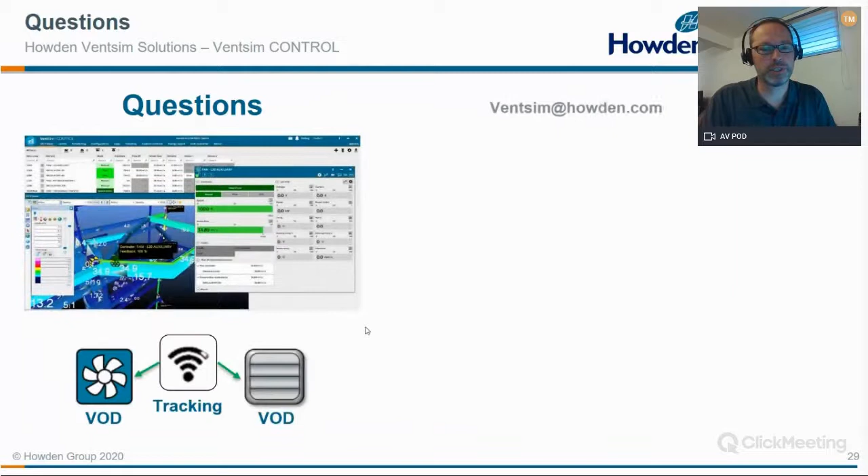Thanks very much, Pavel. That was excellent. It was really great to see all this energy saving capability being demonstrated, and obviously linked with the digitalization revolution that's going on in the mining industry, as well as everybody else, everywhere else. So that's a real example of things in action.

Definitely. Thank you. And we'll ask Thomas Newman to join us and present the next presentation. Thomas is managing director of Artel Pro, and as I understand, has been working closely with Continental Conveying Solutions, and is going to be talking about some of the technical innovation in conveying and bringing us up to speed with what's going on in that environment. Are you there, Thomas? Yes, I'm here.

I'm listening to you very carefully. Okay, all right, well, I'll hand over to you, Thomas, and we'll look forward to it.

Thank you, Tim, for the introduction. I would like to share with you some information about the offer of Continental Conveying Solutions. I'm talking about conveyors, conveyor transport, and how to implement this most effective bulk transport technology into the processes by monitoring the real data. I would like to share some information about fleet management, like in the tire business, but for conveyor belts.

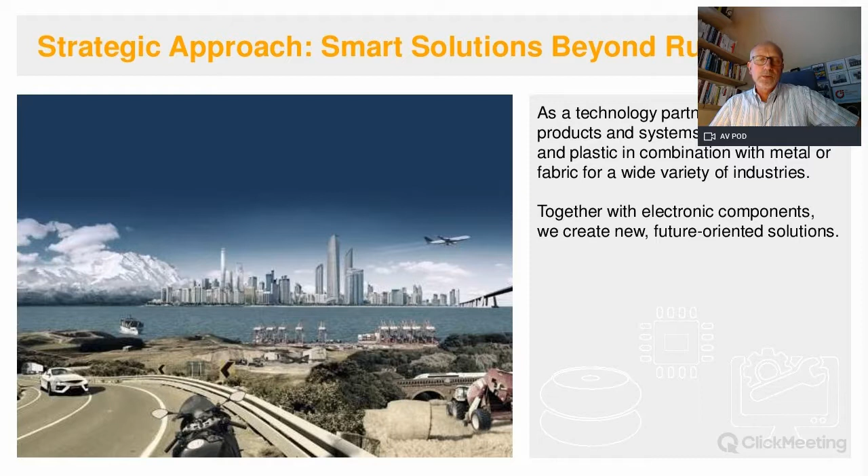Starting with some slides about the company, I'll go through these quickly because we are late, and I think it's quite understandable what is written on the pictures.

Yeah, that Continental is... oops, where is the presentation? Tim, you can see the presentation? Oh yes, the presentation is back.

Thank you. You can see that Continental Solutions is switching from being the leading conveyor belt producer to a conveying solutions offer company, and for that they are connecting these pieces together: the old belt manufacturing, together with some electronic components, together with some service solutions. They are presenting to the market now smart solutions even for conveyor belts.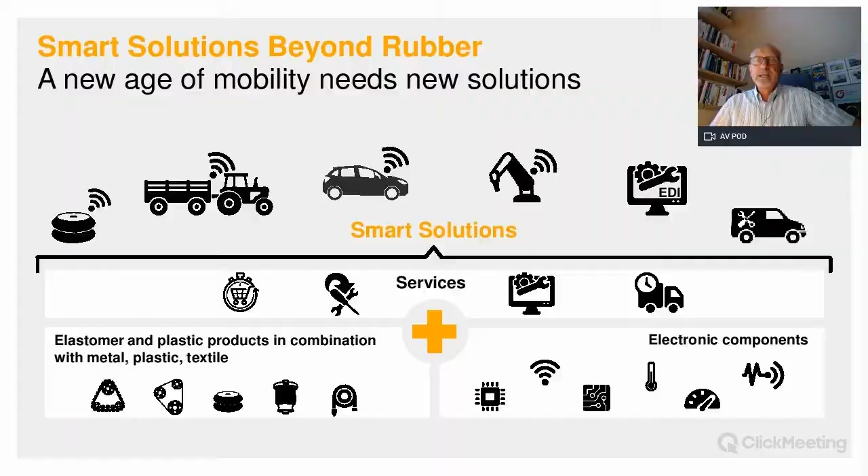Just some figures about the company, with 1 billion euro turnover per year for this part of the business. Continental is offering for the whole process chain, starting with digging, transporting, storaging, and servicing any conveyor in a factory, in a mine, in an open pit mine, or in an underground mine.

What is new is the view on the equipment, a 360 degree view. Under that we understand we are offering the belts, the field service, service materials. We are engineering, helping to engineer the conveying line together with the OEMs, end users, and service providers. And of course we have the equipment to monitor all the real data and the condition monitoring data, and we are offering smart services - I will tell you a little bit more about that later on.

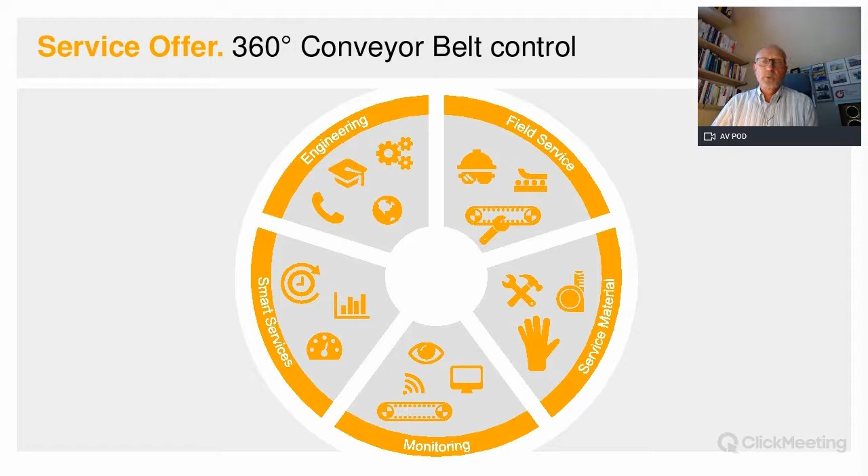What is important to have in mind is that if you are thinking about cost efficiency in mining, you have to understand that the share of transport costs can be very high, reaching up to 60%. That's why it's very worth thinking about transport technology. Very often in mines you will find truck transport, but we are sure that conveyor transport technology is more effective.

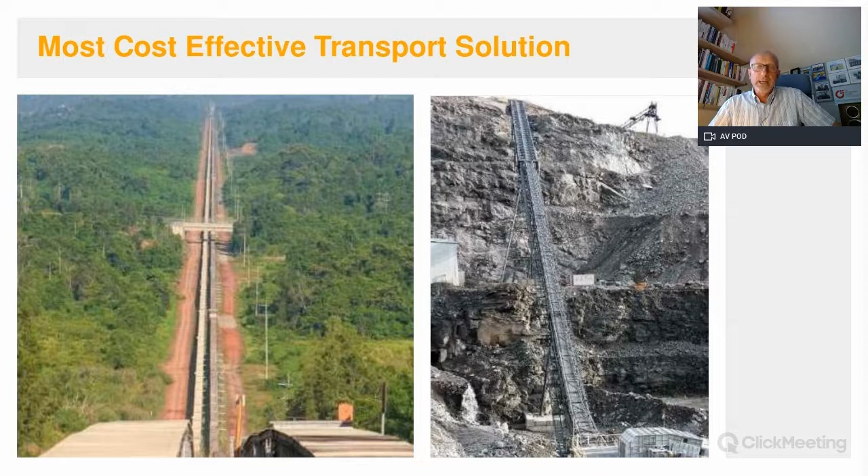This is true in the mine for heavy rock masses and bulk transport, and even in cases of very long conveyors, as visible on the left side, interesting - even with steep angle conveying solutions in use. These conveyors are the arteries of your mine, and you have to care for these arteries to keep them running over the year. That's why it's very important to collect data and use the condition monitoring systems offered by belt companies and conveyor equipment companies.

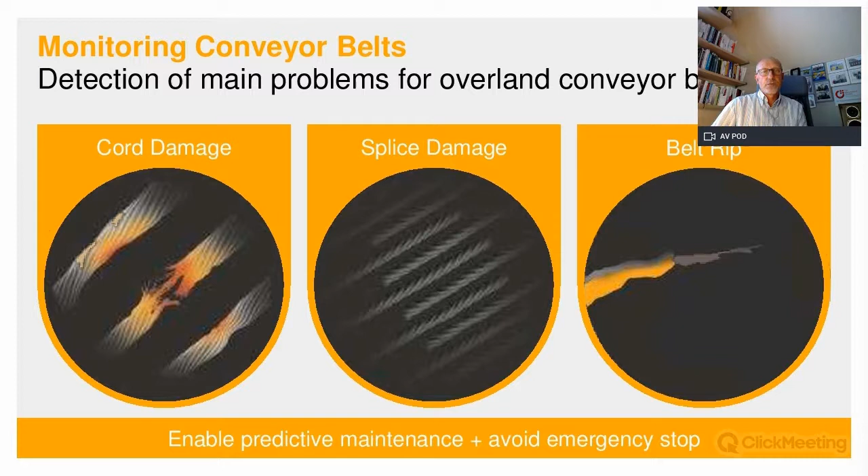Continental is offering a system looking into the belt - able to look into the belt like an X-ray system, but based on a magnetic field system. We can detect and evaluate the data and recommend what to do for the most heavy problems that can arise, such as with the cords in the belt, with the splices in the belt, and we can detect belt rips as well. These three cases can be detected by very strong and stable working magnetic systems.

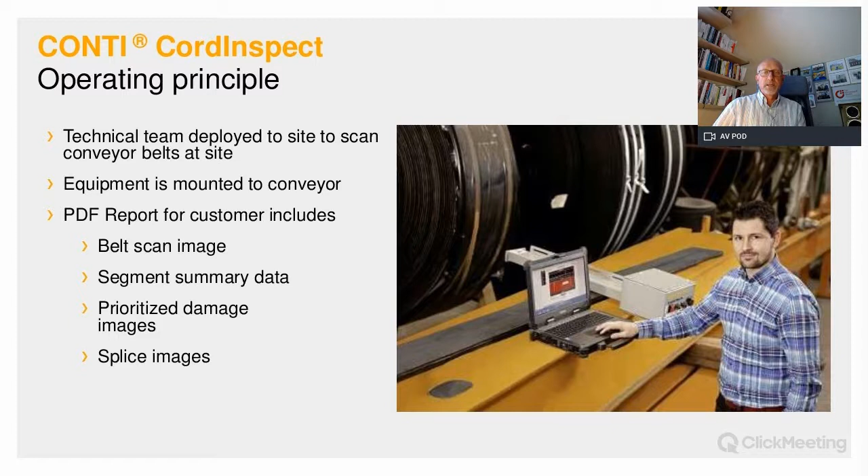These systems can be installed permanently, but can also be installed as a mobile device, allowing scans in the field. In each case, for permanent or mobile installations, you get all information on what condition your belt is running in. This information is very clearly written and understandable - you will see the degree of the problem, where it arose, and when it was detected.

Based on that, you can prepare yourself, your service engineers, and your service provider with top information about which places they have to repair and which places they have to check regarding the condition of the belt.

When we are going on, this is one process, one offer we can do for this predictive maintenance part. But at the same time, we are offering a very interesting solution based on the Continental Cloud. It's already in use for the tire segment of Continental, a fleet management software based on measuring the pressure in tires, checking the lifetime of the tires and stuff like this. And we are doing the same with the conveyor belts now.

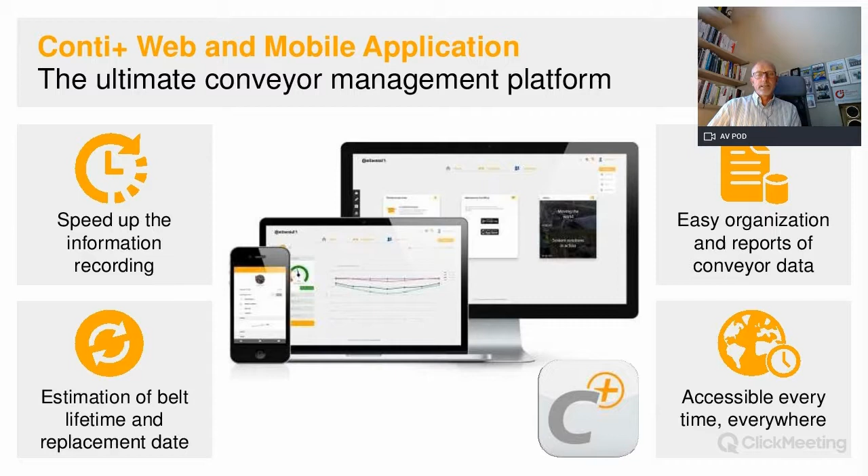And of course, in this system, we are storing our information coming out from the monitoring system as well. And of course, we can create reports and customize this platform, and integrate it into an existing automation system.

Why are we doing so? I think this is understandable, because we would like to provide systems which make the process transparent. We are minimizing the total cost of ownership. You will have, as a customer, a better cash flow and reduced unexpected downtimes.

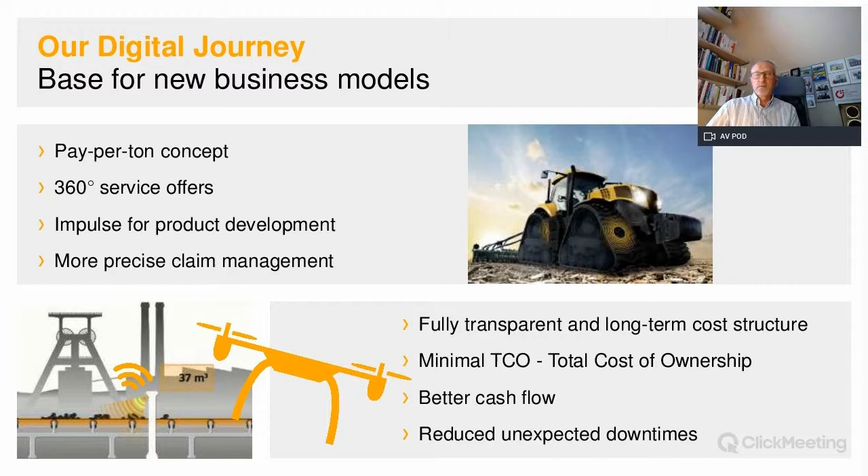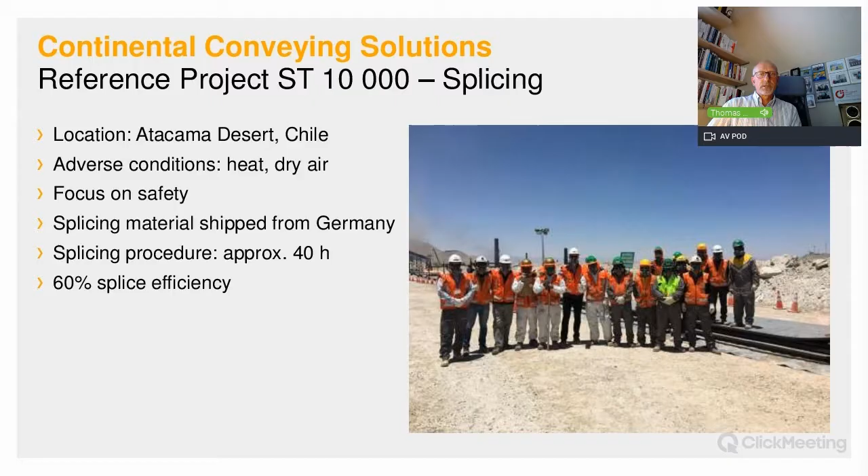You can see here as well, we have delivered monitoring systems for the condition monitoring of this very interesting and very demanding belt running in a tunnel under high inclination. Here you can see the team that installed the belt, and one additional slide showing a very interesting vertical conveyor solution we've applied since about a year ago.

Now we are reaching up to 700 meters with this vertical conveyor. This conveyor was installed in Mexico, and it is running well, running smoothly, and with very low energy consumption. You can transport 200 up to 2,000 tons per hour vertically out of your underground mine.

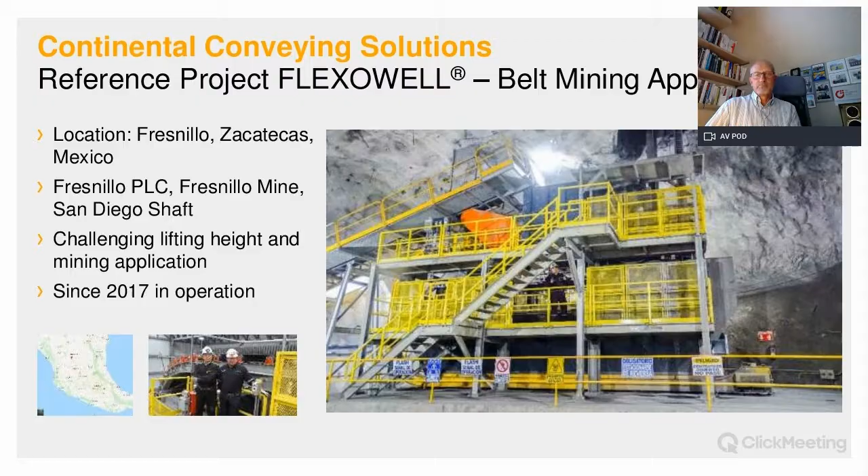Yes, this was my presentation. Thank you for listening, thank you for your attention. My name is Thomas Neumann, and I presented today the solutions of Continental Conveying Solutions.

Thank you very much, Thomas. That was really interesting, great to see that the vertical lift technology is really coming on leaps and bounds as well. I think that's going to be a solution for a few operations. Okay, thank you.

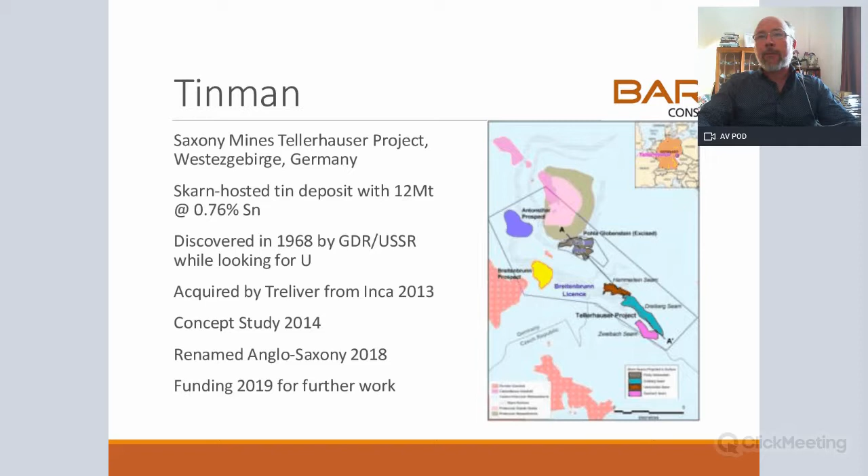Olovo, right on the opposite end of the scale to Poltava. Very small, narrow vein, high grade lead mine, cerussite - before I got involved in this project, I didn't really know what cerussite was. It's a lead carbonate mineral, so very high grade lead, small mine. Historically, I guess, the first new mining license to be awarded in the Balkans since the war. So historic for a number of reasons.

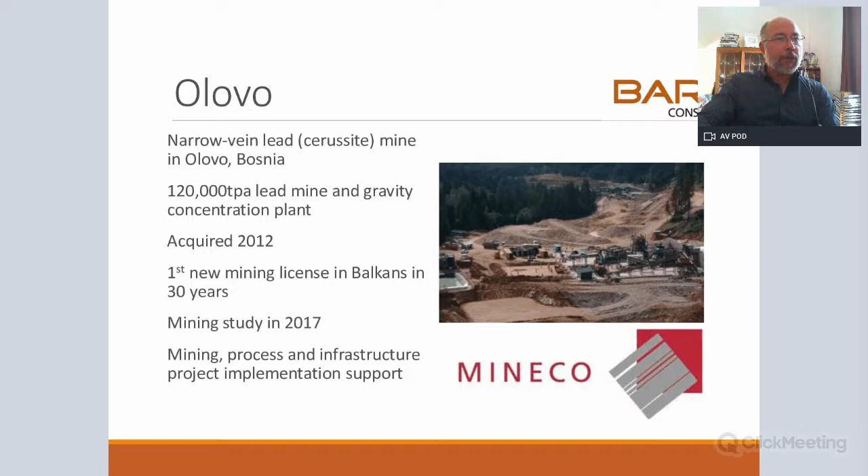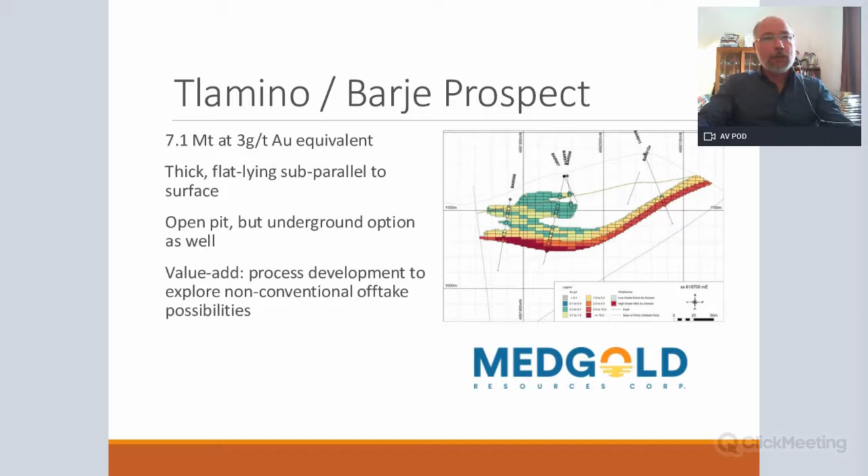Also, more recently, we've been involved with Medgold at Tlamino Barje, again with our partners at AMS. We're at resource statement stage now, going into scoping study. Again, very interesting project - large, thick, flat-lying gold system. Schisty, breccias, lots of variability within the zones, but zones are very well defined. The challenge here is, it's a gold project, but there's lots of other things in it that make it challenging for conventional gold treatment routes. So the value add we brought to this project is innovative process development to look at non-conventional offtake possibilities. We're looking at Albion process here and potentially pressure oxidation, trying to trade off the two against each other. With those options, this project starts to look very interesting and quite prospective.

In conclusion, as I said earlier, we're a small bespoke engineering consultancy with deep experience in Europe and the CIS, former Soviet republics. We're multidisciplinary - in-house we have mining, process engineering, infrastructure - and we work on the geology side upstream of us with a number of partners, and downstream in terms of tailings and environmental with others. We have a largely value-driven approach - value for the client in terms of what value we can bring for projects, but also the value we bring in terms of the scale and scope of study work that we need to do to get things to the next stage of development. So looking forward to more work in Europe and the CIS, and happy to field any questions.